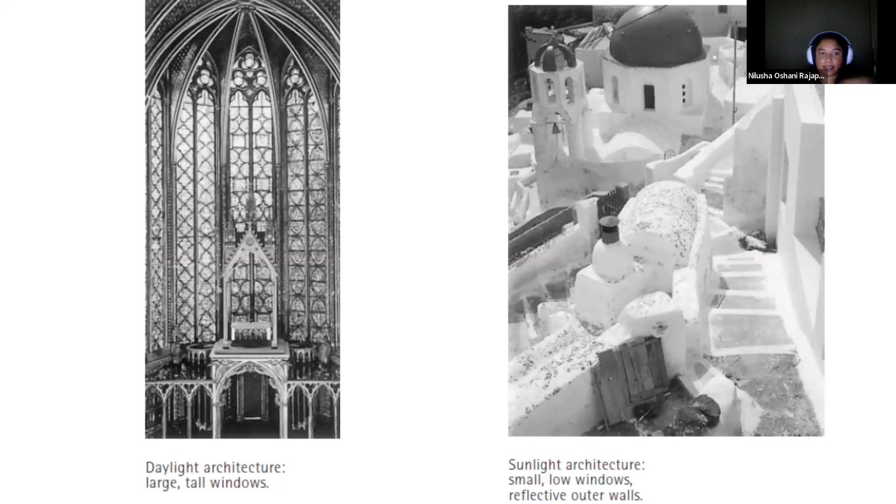So we really need to imitate the daylight properties. Daylight will help us reduce the energy cost during the daytime and improve occupant satisfaction, maybe increase workers' or students' productivity. Sometimes it will increase the sales of outlets if you mix with daylight during the daytime. And of course, it'll improve health. We have our circadian rhythms, our biological clock, which goes with the sun. So considering all these things, it's really important to have daylight during the daytime within our spaces.

And there is also a psychological requirement of people to know what time of day it is and which orientation we are in the environment. So in that case, this architecture is developed to receive some daylight, to see the view outside. Those things are required when you are designing.

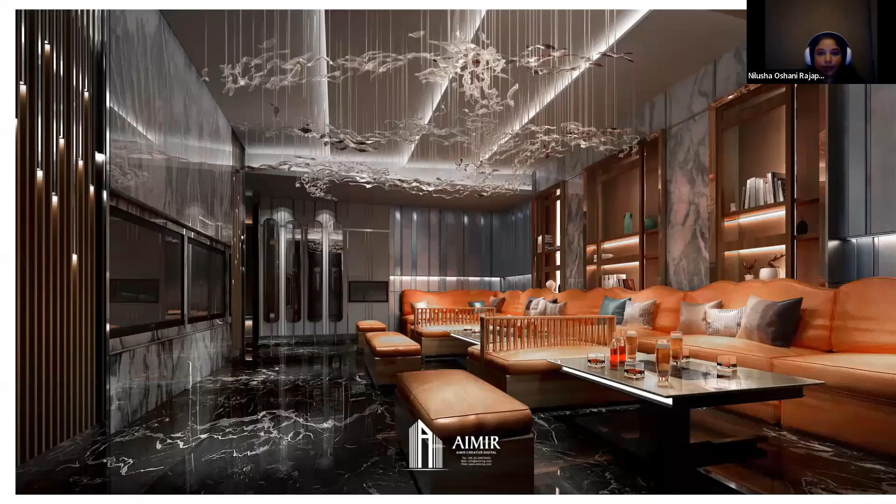Now this one is a VIP bar kind of thing, a VIP room. So you will see different lighting layers: the shelf lighting, decorative lighting, ceiling coves, and general lighting. So if the interior is changing for the same space, then our lighting also should be changed. We can't keep the same lighting sources in the same location.

So when you are thinking about lighting designs, it's really integrated with the interior design or the architecture of the building. We can't go alone. A lighting system cannot stand alone. It should be coordinated and integrated. The same space can be designed differently, and at the same time we also have to change our lighting design to match the interior design. It shouldn't look like the lighting is one system and the interior is a different system. It should look like just one system.

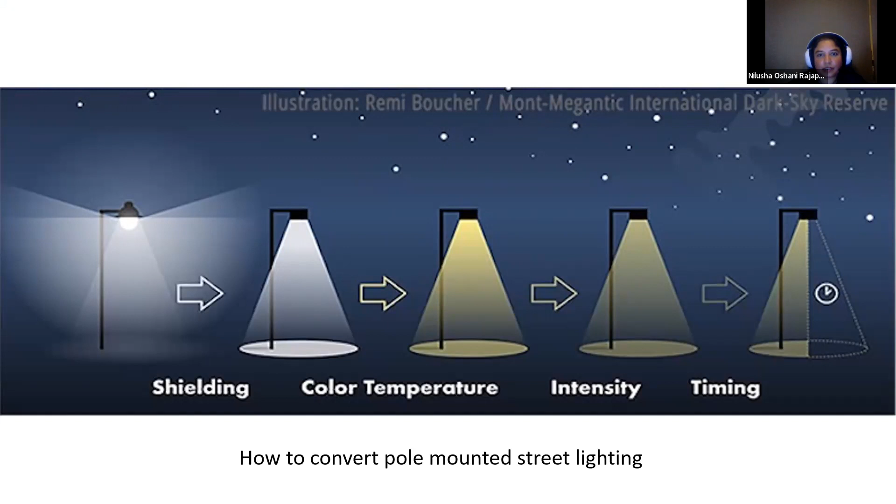How can we improve it? So this shows: control our beam angle, control our light distribution, and also add timers. Those are the main things. And another thing is the color temperature. This way we can convert the cities and reduce the light pollution. So basically they recommend some of the light fitting types, basically controlling the distribution.

So the first one is a very diffused one. It gives light in every direction, but the second one gives only where you need lighting. Well focused. So here I think you can understand. We can cut the glare also, and for the useful lighting, which area we need to focus, accordingly we can limit the beam angle or the light distribution.

So there are things called dark sky parks where you can go and see the nice, beautiful sky with the stars. So from here you can understand how people polluted the cities with light. So this is the transformation they are looking for: to limit the lighting distribution, angle, direction, and reduce the glare, and asking us to take action by ourselves and transform this into better cities, better environments.

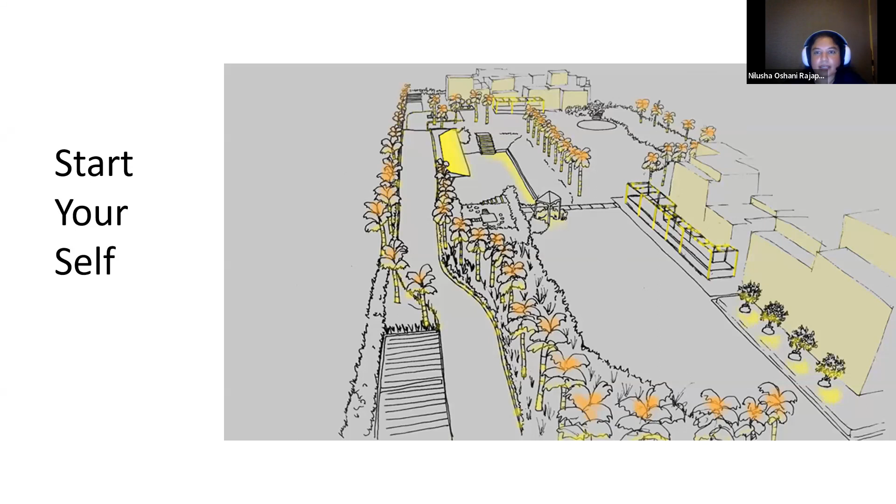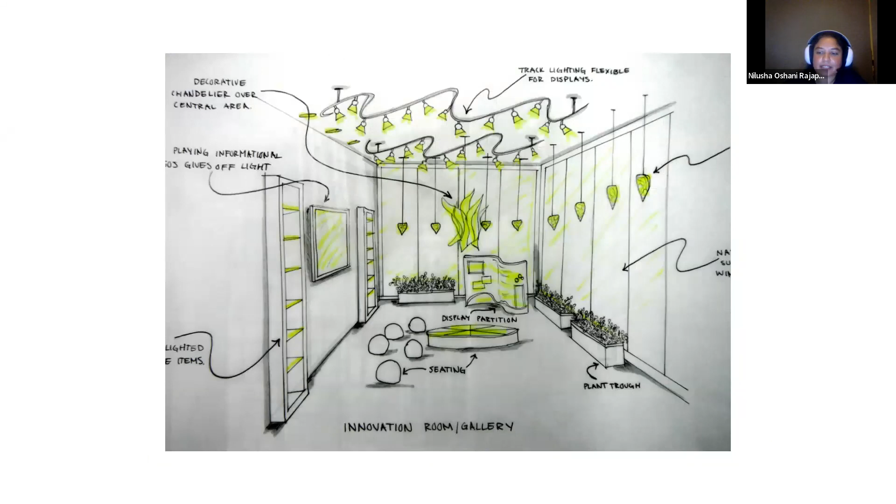Another thing is you can start with your lighting now. If you know the architecture design or the interior design or the landscape design, you can simply sketch your ideas and improve them. So this is, I think, where you can start. So it's really easy. For lighting designers, sketching is a must, because this is where we initially communicate our lighting ideas with the other designers or the consultants or the client in the project.

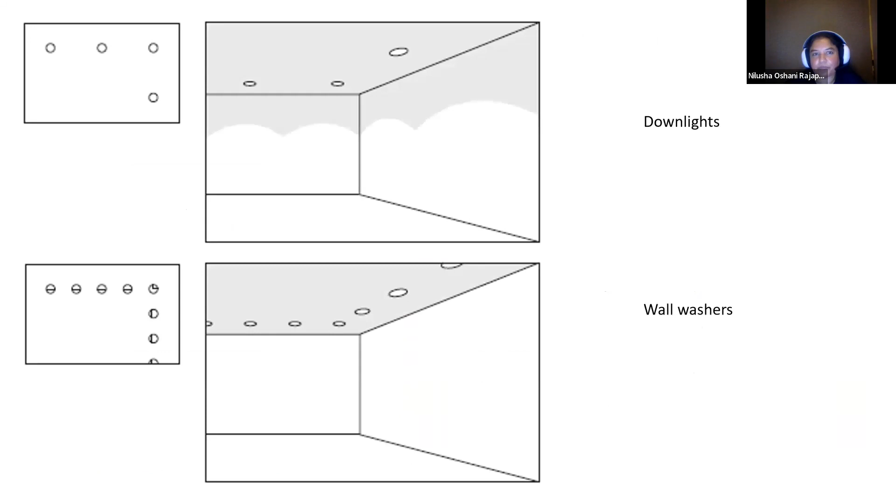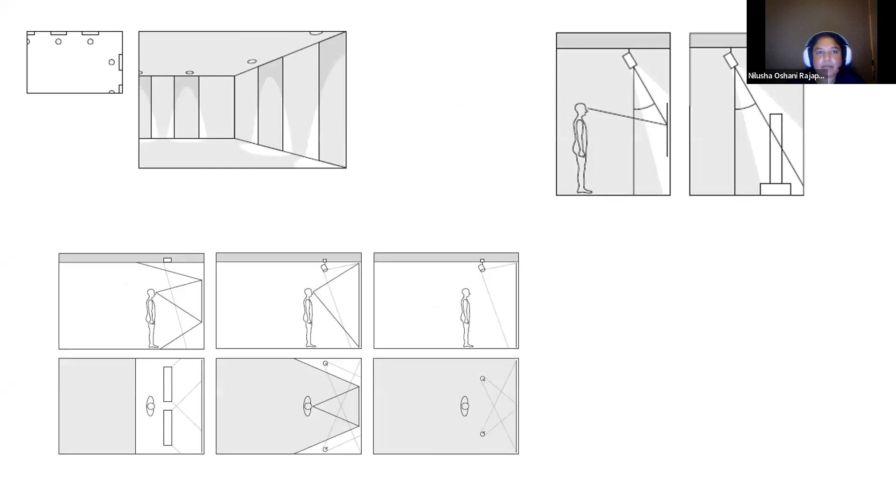Even now you can start. You can find a nice attractive image from the web and make it black and white, and then use a yellow color pencil and sketch how you want to light up that space. So further we can develop the project, locating light fittings in different ways, because if you start to do that, there are many ways. It's not just one way. Downlights, wall washers, even the same lighting effect you can have with different light types.

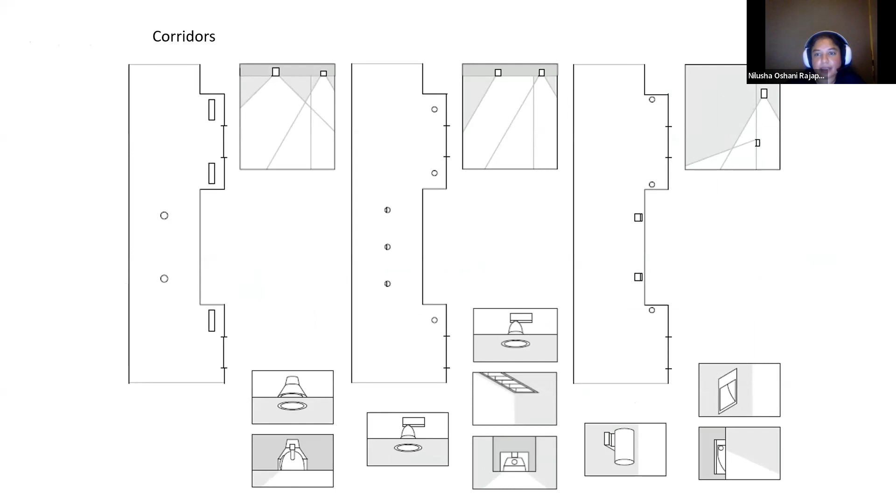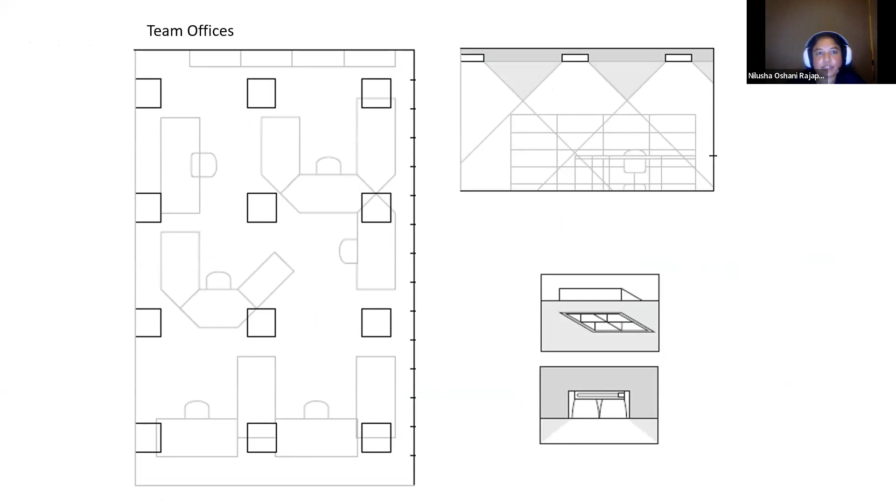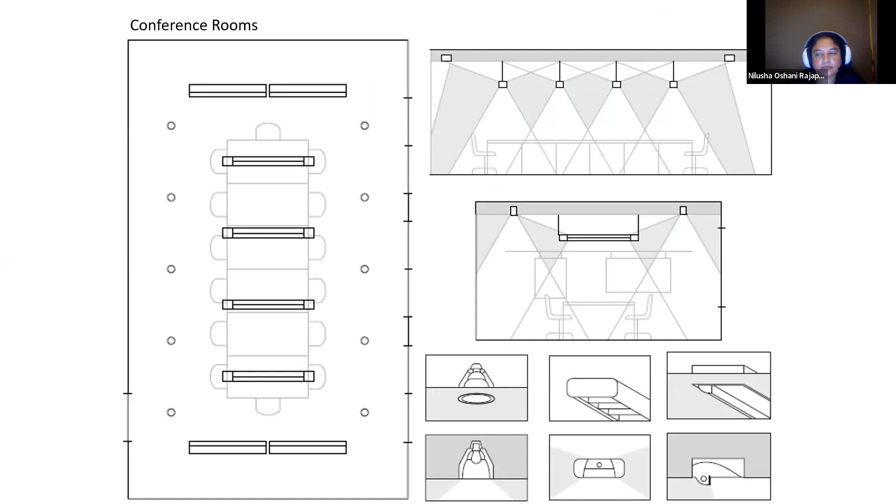And now this corridor, you will have different designs. Here 3 designs are shown. Even the staircases. This is kind of a typical office arrangement. And then you can improve it. Kind of a boardroom, auditorium, you can start with the directional arrows also, where it's going to direct.